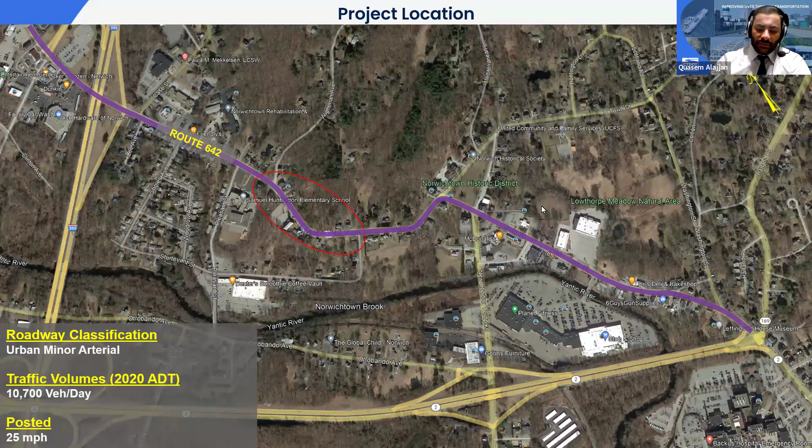There are 7 retaining walls within the project limits. The Route 642 corridor is constrained on both sides by existing retaining walls that are located on private property. Retaining walls 100, 101, and 102 carry a substandard 3-cable guide rail. There is an existing unmarked bus stop shown by the red dot near wall E1.

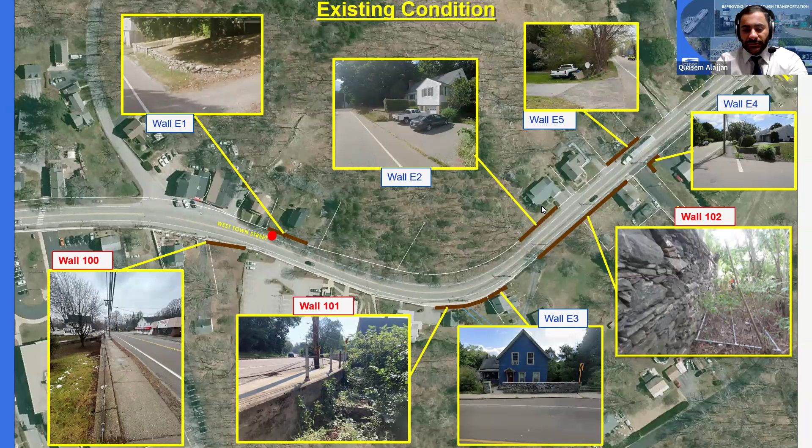Crash data in the project limits was gathered from 2018 to 2021. The majority of crashes are fixed object crashes. There were 9 total crashes through the curve, with 3 resulting in injuries. There is a pattern of roadside departures through the curve, including a 2019 crash that resulted in compromising a section of 3-cable rail and damaging retaining wall 102.

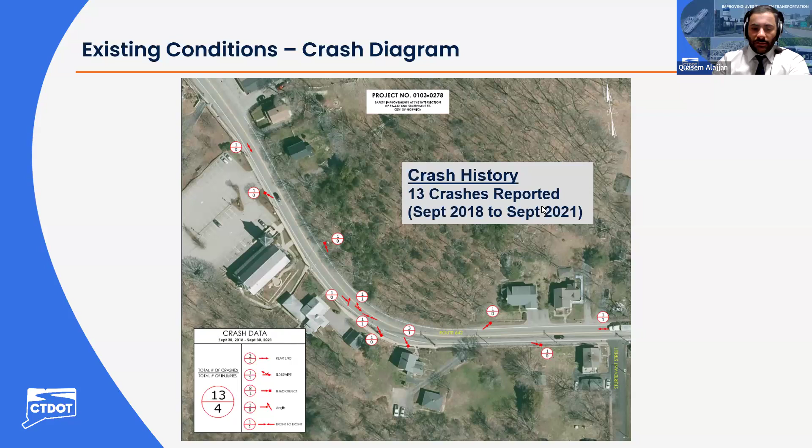The super elevation and curve radius don't meet design standards through the curve shown in the photo.

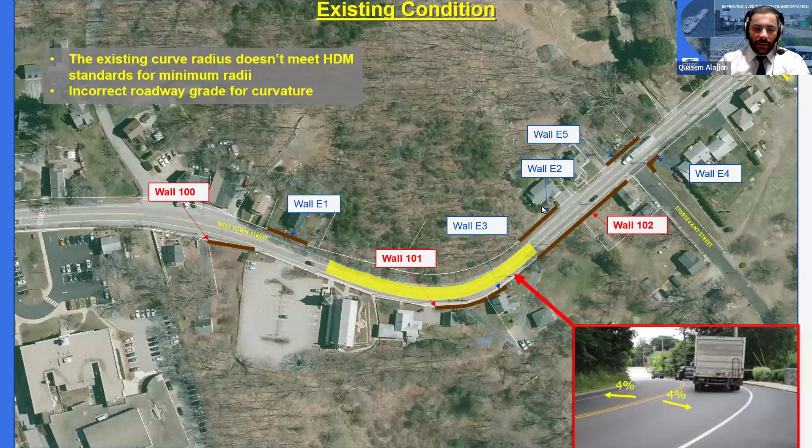The purpose of this project is to replace the existing substandard 3-cable guide rail with a rail system that meets current federal standards and to improve the highway geometry.

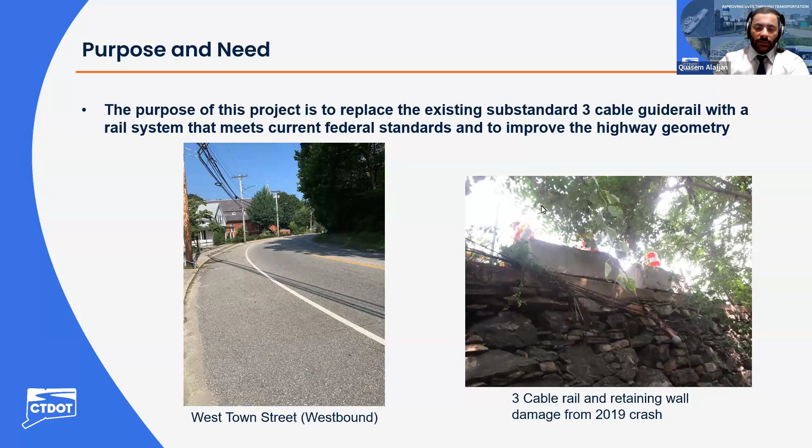The approximate limits for removal of the existing 3-cable guide rail and concrete cap of retaining wall 102 are shown here by the red line.

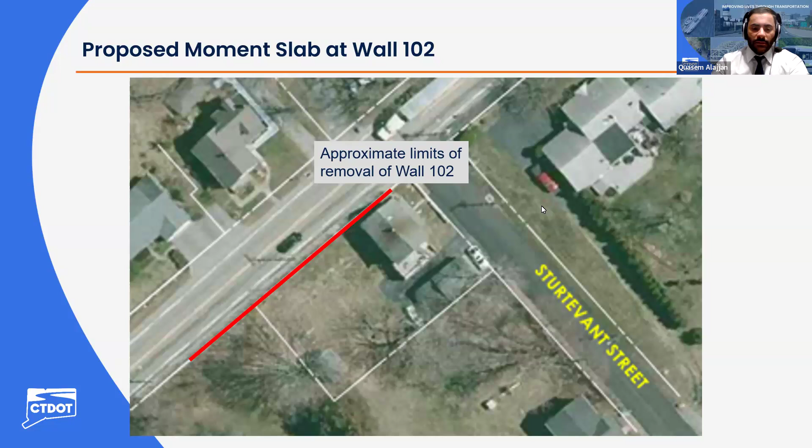The substandard wire rail system will be removed, along with the existing sidewalk, concrete cap, and the top portion of the existing dry stack wall, and replaced with a rail system that meets current federal standards mounted on a moment slab. A moment slab is a self-supporting slab designed to carry a rail system that resists overturning or sliding from vehicle impact.

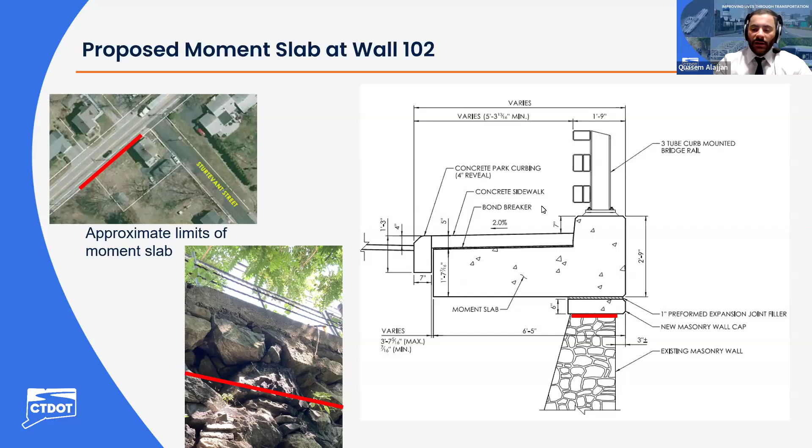Thank you, Quasem. My name is Josh Marcinkowski. I'm the lead state highway designer for this project, and I will begin with a brief overview of the general proposed roadway design. We are proposing 11-foot travel lanes in each direction.

We will have to perform roadway full depth reconstruction through the existing curve in order to flatten the curve and provide the proper roadway cross slope through the curve. The proper roadway cross slope means that we will have to super elevate the roadway inside the limits of the curve.

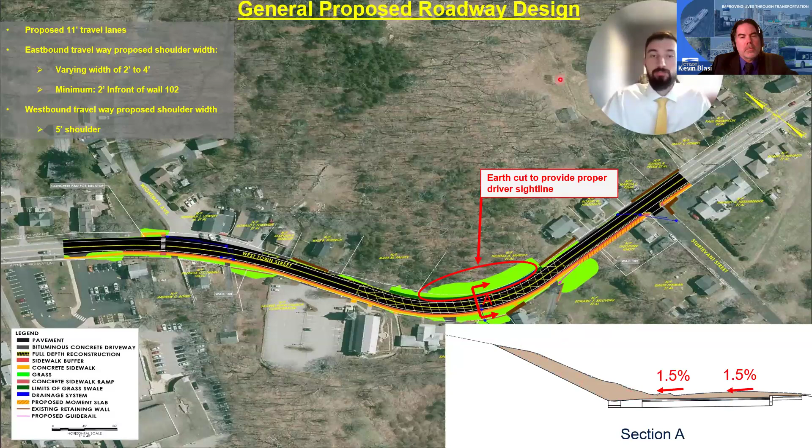Moving into the proposed roadside improvements, CTDOT has analyzed 3 locations where existing 3-cable guide rail on top of retaining walls are located along the south side of State Route 642. At the locations of Wall 100 and Wall 101, it is proposed to bury the entirety of the existing retaining walls and remove that existing 3-cable guide rail.

This will help reduce future roadway maintenance costs, as well as the grass slope will be a recoverable slope. In the possible event of an errant vehicle, they will be able to recover. In the case of Wall 102, only a slight portion of that retaining wall will be graded out at that multi-residential driveway. New metal beam rail will be placed there to protect the retaining wall that Quasem presented previously.

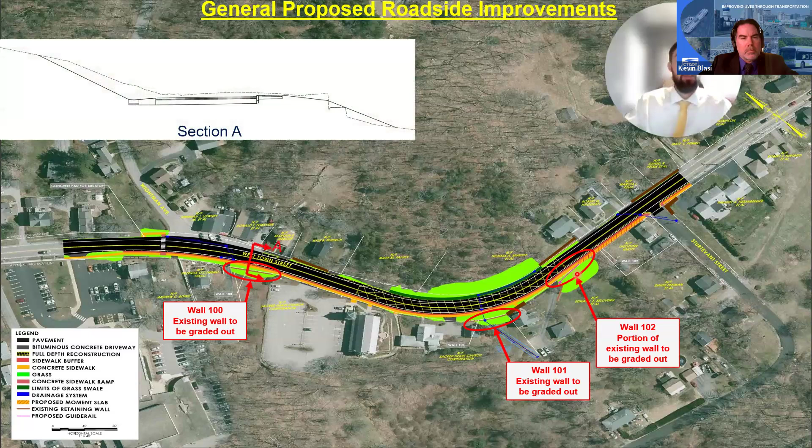Here is a typical section of how the roadway will look at each retaining wall where it's going to be graded out. You can see the existing retaining wall portion of it will be removed, shown by this red shape here, and then there's that grass recoverable slope you see here.

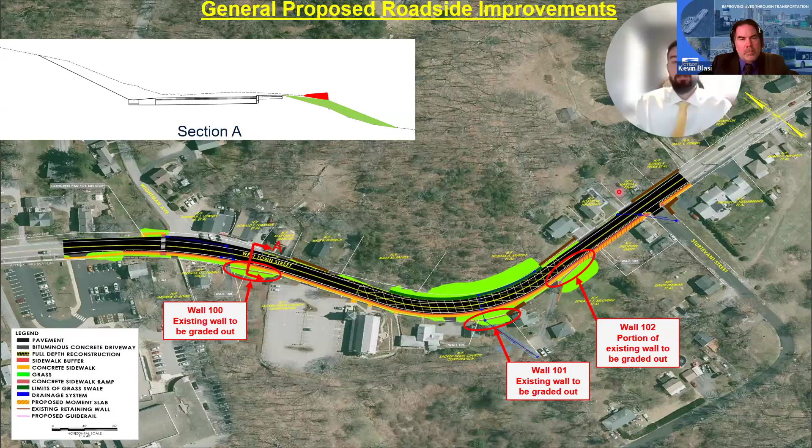Realigning and flattening that horizontal curve that I was discussing in the previous slides will allow us to install a 2.5 foot wide buffer located along the south side of State Route 642. The buffer will be made of concrete material at this point. That buffer will be placed between the curb and the sidewalk.

This will allow those existing utility poles that are located within the sidewalk to be relocated out of the sidewalk and into the buffer, so we can provide a continuous 5 foot wide sidewalk through the project limits on the south side of State 642, which is required by the department's new complete streets policy.

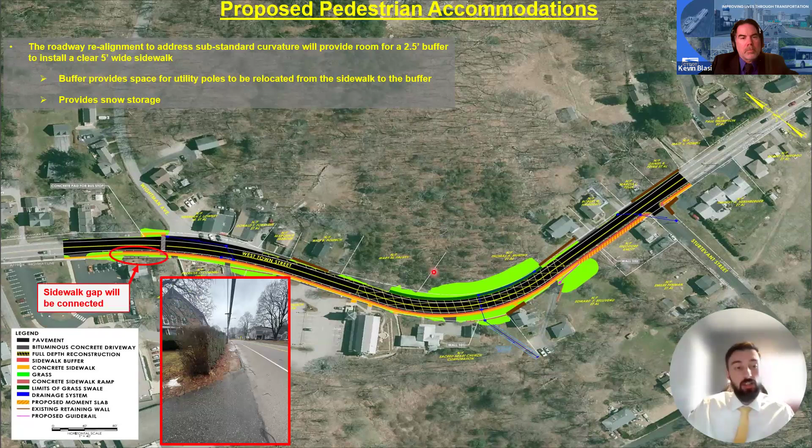Additionally, there is an existing sidewalk gap where you can see a worn path from pedestrian travel. This will be closed through the proposed project with new sidewalk.

So here's the typical roadway section to show you how the proposed sidewalk and roadway will look in the finalized conditions. I've laid out the existing conditions in green here.

We can see the existing center line, the existing shoulder, edge of road, and the existing sidewalk. This is the south side where I'm circling here, the south side of State Route 642, where we have those utility poles located within the existing sidewalk, which are restricting the sidewalk locally at each pole to be sub-ADA standards.

Just a quick note, ADA stands for the Americans with Disabilities Act, which was a civil rights law passed to protect people with disabilities from discrimination in many areas of life, including transportation, which is our case here. It is enforced by the Department of Justice, so we must meet that criteria.

Now, just moving back to the design here, I'm going to show you what happens when we realign the curve. It allows us to have additional room to install that 2.5 foot wide buffer to move that utility pole out of the sidewalk into the buffer to achieve that 5 foot wide sidewalk.

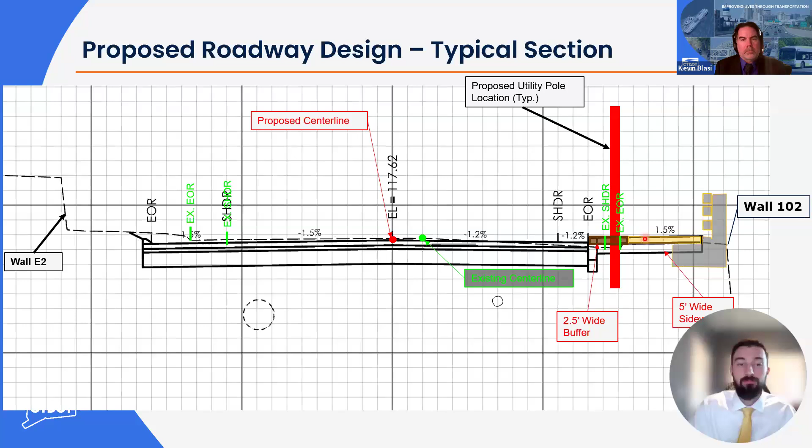We do have a bus stop located within the project limits. It is owned and operated by the Southeast Area Transit District. Currently, the bus stop does not have any signage or pedestrian accommodations to it, which would allow users to safely access the bus stop, which does not meet our current CTDOT complete streets policy.

So we are proposing to relocate that bus stop to the intersection of Whitman Ave and West Town Street, where we will install a new concrete pad to allow riders to safely embark and disembark the bus. Additionally, we will install ADA compliant sidewalk ramps and a painted crosswalk to allow users to safely access the bus stop or to continue walking along West Town Street.

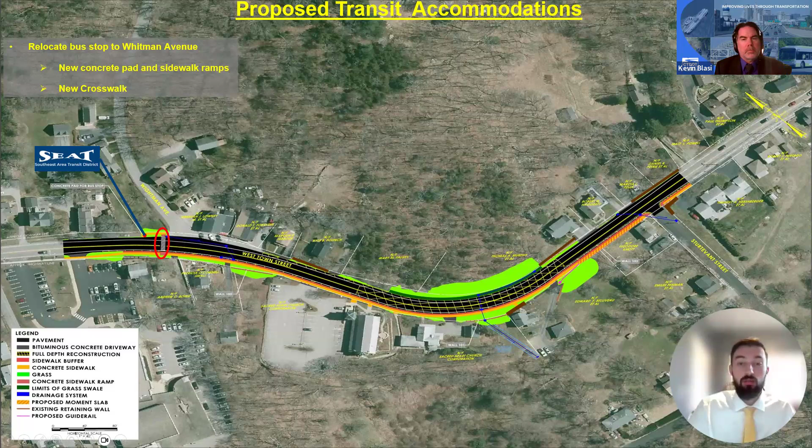Thanks, Josh. A few important points regarding construction considerations. Traffic shifts will be required to perform the proposed work. These shifts will place the traffic in an alternating one-way configuration, implemented via temporary signalization for longer time frames and by flaggers for shorter time frames. Pedestrian and driveway access will be maintained throughout the duration of the project.

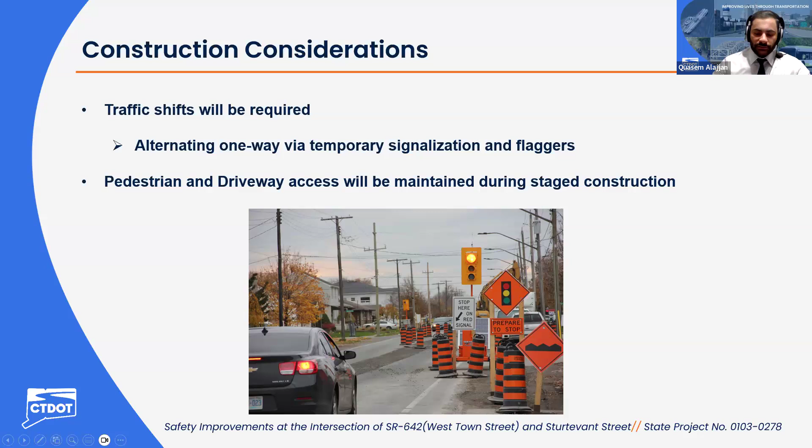The gas main will require either temporary support during construction operations for the sidewalk or relocation in advance of the sidewalk work. It's possible that relocation of the gas main may also require relocation of the 8-inch water main to provide required utility clearances. These options and other required relocations will be finalized with the affected utilities as the design progresses.

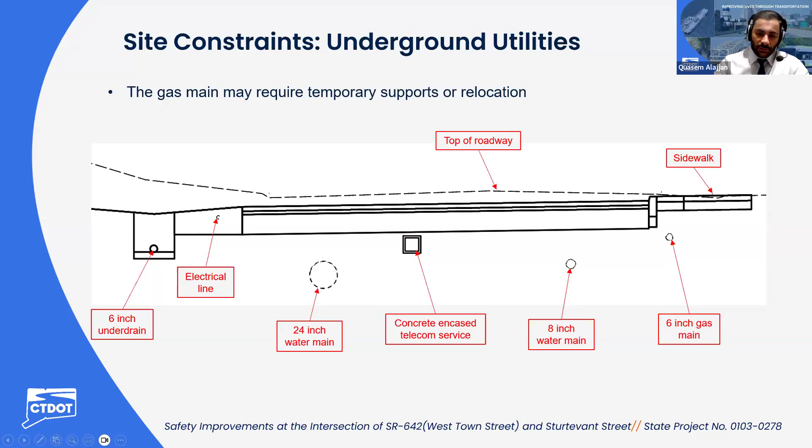This project will require several property easements, including construction easements, sloping for the safety of the highway, and an access easement to gain access to an existing drainage right-of-way. Partial sliver acquisitions are also anticipated to accommodate sidewalk improvement along the corridor.

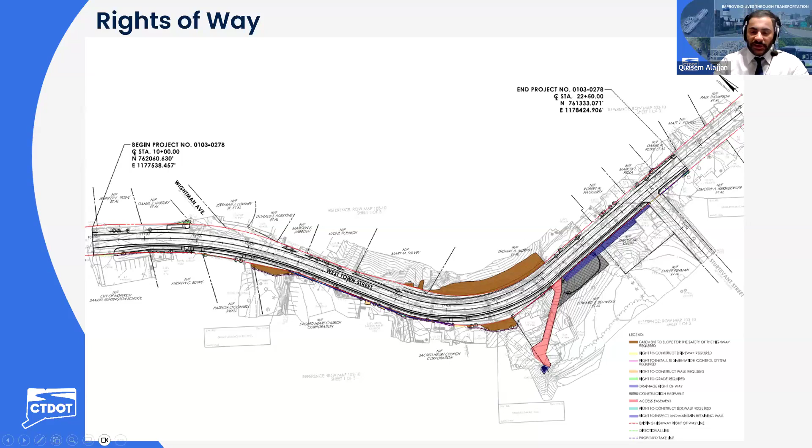Thank you, Quasem. So again, my name is Kathleen Ericson, and I'm an assistant project coordinator with the department's Division of Rights of Way. Our office is responsible for acquiring the property rights that are needed for transportation projects all throughout the state. So I'll be giving you a brief overview of what our acquisition process looks like.

But before I get further into that, I do want to mention that the specific property impacts for this project are still being finalized, and they may change as the design progresses. Also, any required property rights will be acquired in accordance with Connecticut General Statutes, Sections 13A-73 and 13A-98E, as well as the Uniform Act. Next slide, please.

The right-of-way acquisition process begins once the design has progressed to a development milestone and all the impacts from the project have been determined. At that point, each affected property owner will receive from our office a formal letter of intent to acquire, along with a property map which depicts the exact property rights to be acquired. On the screen here, you can see a sample of what the property maps look like.

Next, our office will determine the fair market value of those property rights, which will be used to establish an offer of just compensation. That offer will be sent out to the property owner in writing, and a right-of-way agent will be available to meet with the property owner to explain the project, go over the specific impacts to their property, and to explain the state's offer.

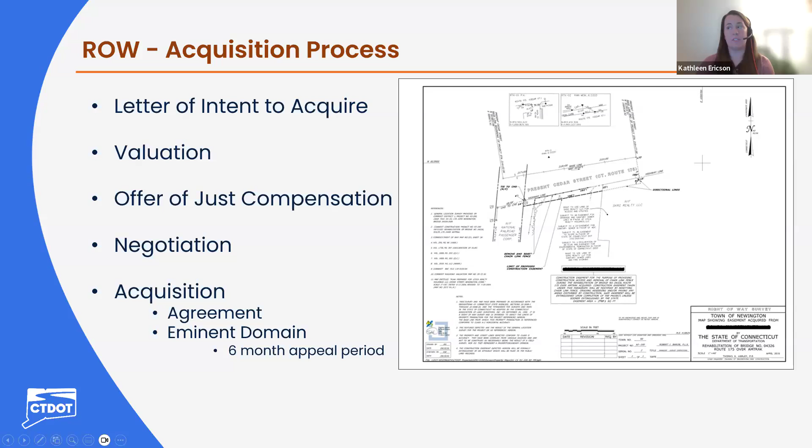Design completion for the project is spring 2026. Construction will take place in fall 2026 through summer and fall 2027. The construction cost is approximately $3 million.

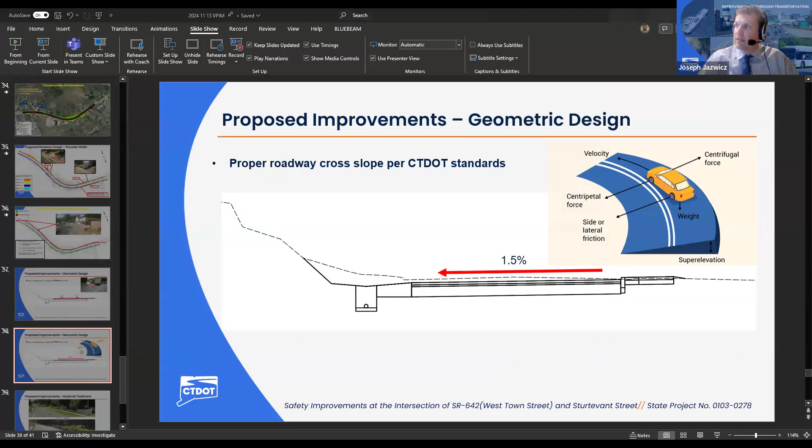Quasem, maybe if we jump to slide 38. So we'll be rotating the road along its center line and raising the outside edge of the roadway adjacent to the curb line where the sidewalk would be. That's designed to basically keep vehicles on that trajectory so they can navigate that curve appropriately. We recognize that speeds have become an issue through here, but with these treatments, we believe it'll give a little bit more driver comfort while not increasing vehicle speeds.

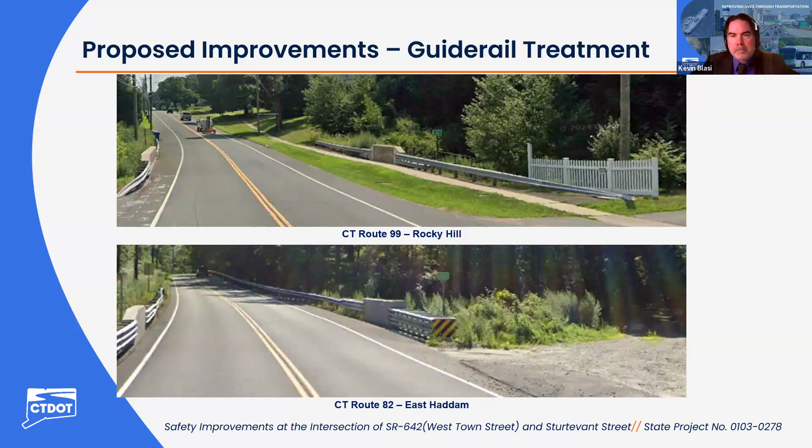If you want to bring up slides 39 and 40, we can show a picture of what Joe is mentioning. The rail system would be as shown in the top picture. Don't pay attention to the bottom picture - we're not putting in a crash attenuator. The top photo shows the type of rail system we'd be putting in, and here's our three-tube system that would run along the top of retaining wall 102.

Paula, following up, asks: are you then considering Jersey barriers? I see the image, thank you. Paula, no Jersey barriers here.

I'm not sure if it's clear, so I'll clarify: when you note protecting the sidewalks, we're not going to have a barrier between the sidewalk and the road. I'm not sure if that's where you were going with that - you're welcome, I just want to make that clear. If that's something you or anyone else was considering, we're not having any kind of concrete barriers between sidewalk and roadway.

However, I want to reiterate that there's a 2-foot buffer that will be incorporated into our realigned roadway to allow for more room between sidewalk and roadway. Regarding the buffer, that's typically a different treatment than the actual concrete sidewalk itself. We want to differentiate between those two areas because the concrete sidewalk is intended for pedestrian circulation, whereas the buffer is more intended to store objects such as mailboxes, utility poles, and whatnot. So often it's a slightly different treatment, but those treatments will be worked out with the municipality as design progresses.